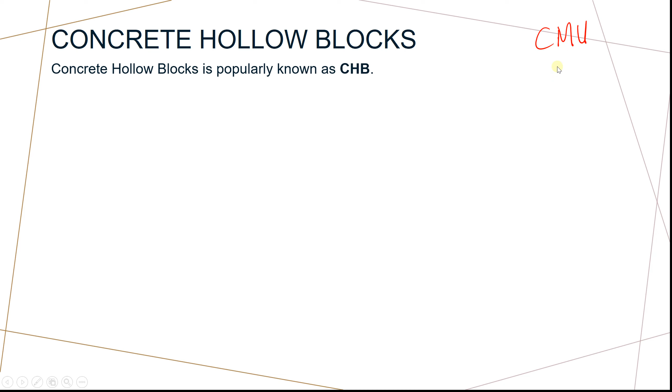Another name for this is CMU, concrete masonry units, of which concrete hollow blocks are one. Concrete hollow blocks are popularly known as CHB. CHB stands for concrete hollow block. Now, CHB is classified as load-bearing and non-load-bearing blocks.

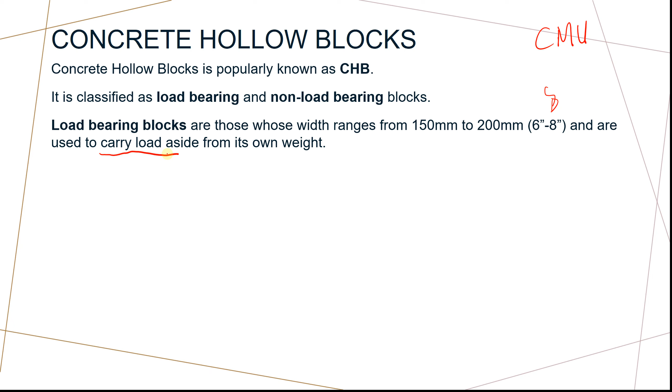Sir, what's the difference between the two? When we say load-bearing, aside from being larger, generally these are 6 inches to 8 inches. The load-bearing blocks are used to carry load aside from their own weight. So aside from self-weight, load-bearing blocks carry other loads. We are referring to the structure loads.

Non-bearing blocks, sometimes called non-load-bearing blocks, are blocks intended for walls, partitions, fences, dividers, and the like, carrying their own weight, whose thickness ranges from 70 millimeters to 100 millimeters. That is 3 inches to 4 inches. But take note that non-load-bearing blocks are not limited to this size. There are also 6-inch non-load-bearing blocks.

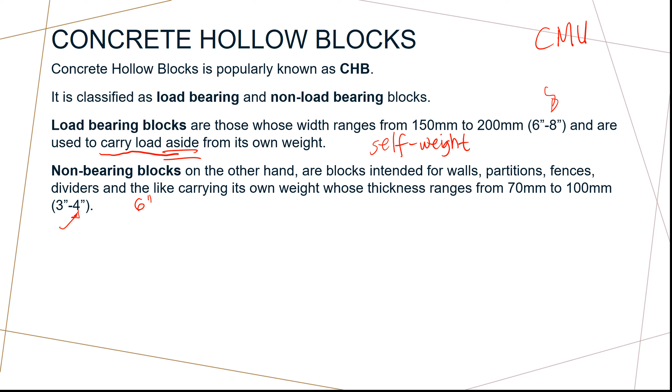But the difference between the two is that load-bearing blocks carry loads aside from their weight. Non-bearing blocks only carry their self-weight. So this is the CHB. I believe you're already very familiar with CHB because CHB is a very common construction material in the Philippines.

Now, in the CHB, if you look, we have these openings here. We call these the core or the cells. The standard CHB has 3 void cells and 2 half cells at both ends, having a total of 4. So we have 3 cells in the CHB, 1, 2, 3. And at the end, this is assumed to be a half.

But it depends on the manufacturer; they have different manufacturing equipment, and so on. So it is very important, when buying CHB, as much as possible, to stick with one supplier for that CHB, because your estimate might be wrong if you switch suppliers.

Okay. These hollow cells vary in sizes as there are different manufacturers that use different types of mold. That's why the size differs depending on the manufacturer. But in this discussion, we'll follow a standard size of these voids or cells in our calculations later on.

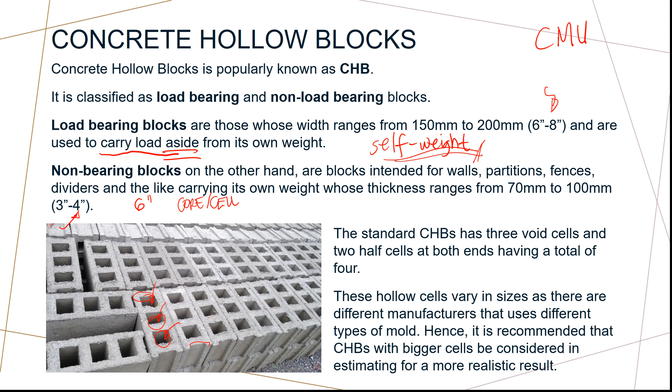CHBs are a common building material in the Philippines, used to lay out the structural skeleton of a building to be reinforced later on by beams and columns. Generally in residential structures, you'll see the wall goes up first while the beams and columns aren't there yet. So in the Philippines, CHB is generally laid out to become the structural skeleton before adding the columns and beams.

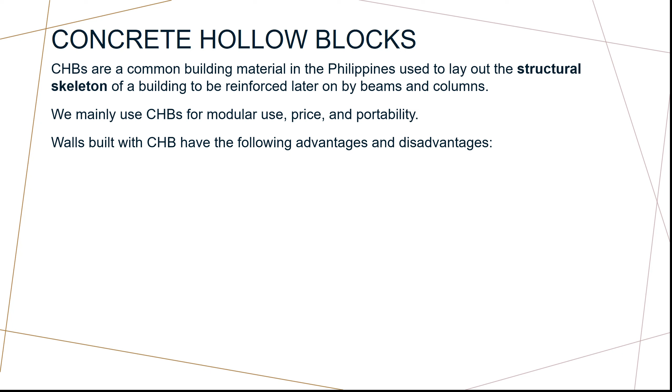We mainly use CHBs for modular use, price, and portability. Walls built with CHB have the following advantages and disadvantages. So, what are the advantages of CHB? CHB is durable and strong, non-combustible, fire resistant, affordable, readily available, yes, this is very readily available, there's plenty of supply, and weather resistant.

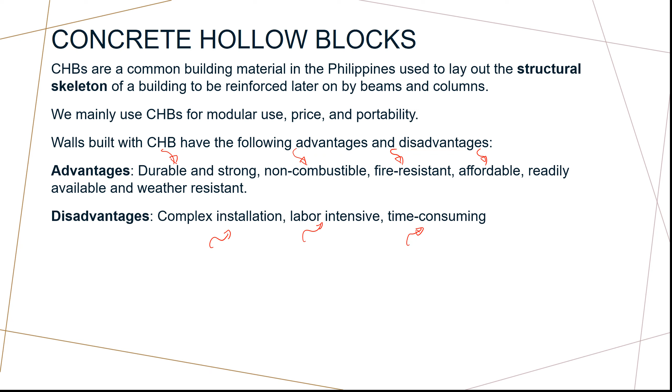Now, what are the common types of CHB in the Philippines? Aside from load bearing and non-load bearing, now we are talking about the types according to size. There are two common types of CHB in the Philippines according to size: the 6 inches CHB and 4 inches CHB, or 100 mm CHB.

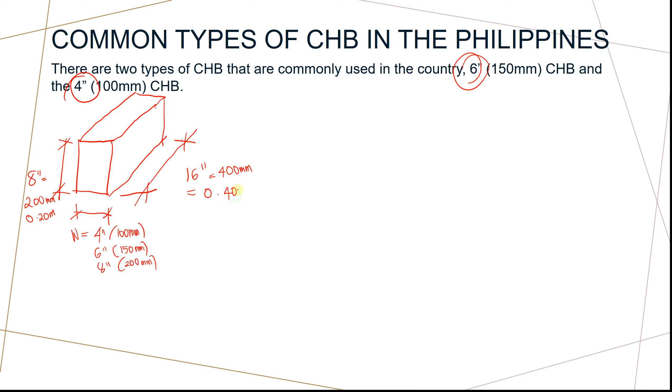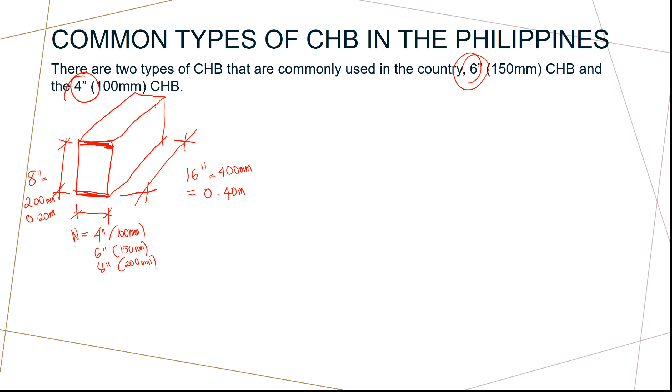So this 6 inches or 4 inches CHB, what we mean by that is the width. We have 4 inches or 100 mm or 0.10 meters, and 6 inches or 150 mm or 0.15 meters. Take note of that - this is what is meant by 6 inches and 4 inches.

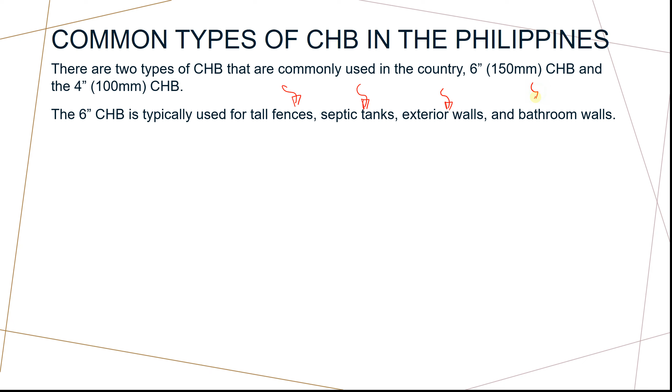Typically, the 6 inches is used for tall fences, septic tanks, exterior walls, and bathroom walls, because it is thicker. Ideally, 6 inches is better for exterior walls to help protect the structure against weather. The reason is since it is thicker, you can ensure more protection from weather, it performs better than the 4 inches which is thinner. Same goes for septic tanks and tall fences.

The 4 inches is typically for low walls and interior walls. By the way, what is considered interior walls or exterior walls? This is your perimeter, this is your house. So if you plan here, these are the walls here, whatsoever, etc. Now, exterior walls are exposed directly to weather.

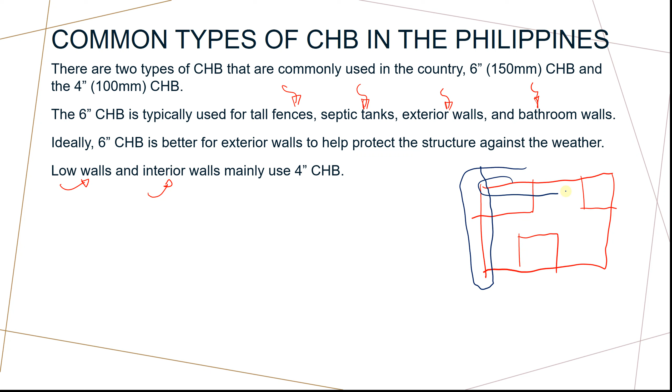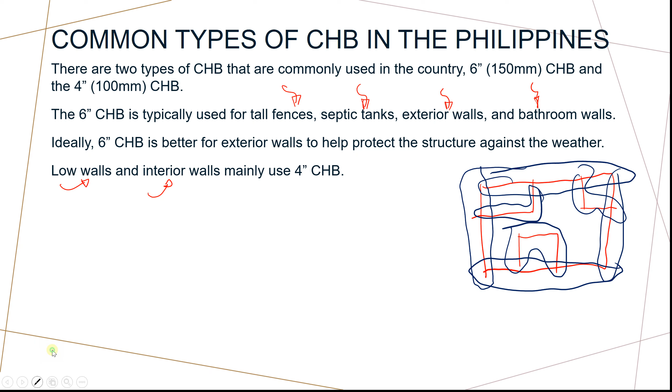So for this example, this is the exterior walls. Ideally, it's much better if 6 inches is used for that, though that is not really required that it should be 6. Others use 4 inches - that is up to the contractor, to the designer. And then the interior walls, these are inside, that we call the interior walls, because it is inside the structure. So typically, of course, interior walls use 4 inches.

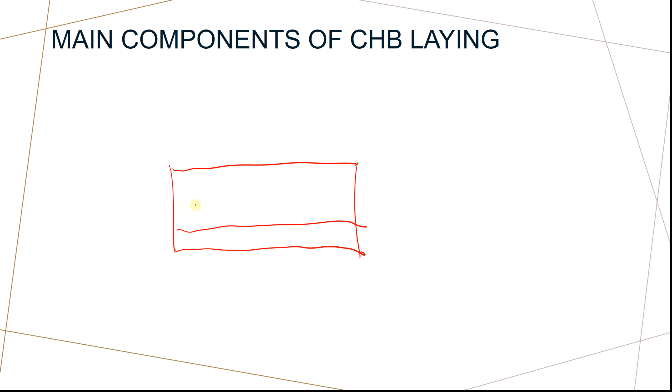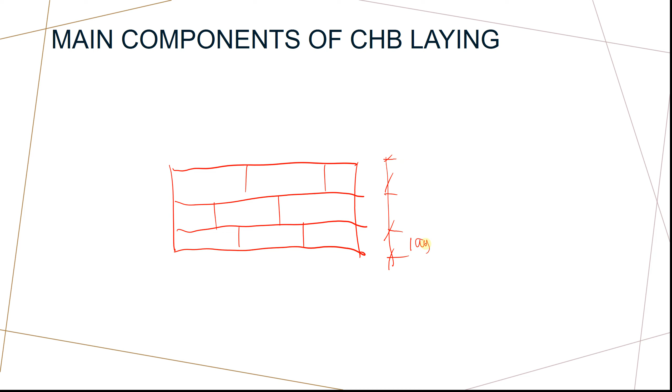Now, what are the main components of CHB laying? For the CHB, if you build it piece by piece, you do it block by block, layer by layer. So let's look at it - if we have a wall made of CHB, this is one type of arranging the CHB. If you have a wall that is arranged by block, we have layers - the CHB is layered when we install this on site.

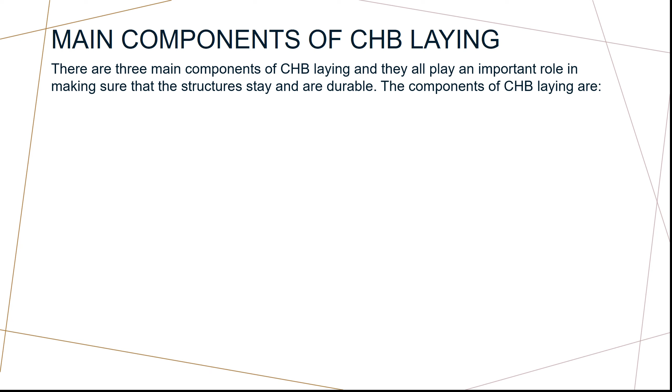There are three main components of CHB laying, and they all play an important role in making sure that the structures stay durable. The components of CHB laying are: CHB, of course, this is the basic building block. Walay laying of CHB if there is no CHB.

Mortar - what is this mortar, sir? Mortar is the mixture of cement and sand that you put in the concrete cells, the core for the CHB. Mortar helps to bind everything together and provides compressive strength to help the concrete or CHB become more durable. And then the rebar, of course, in the wall, that's the kabilya, right?

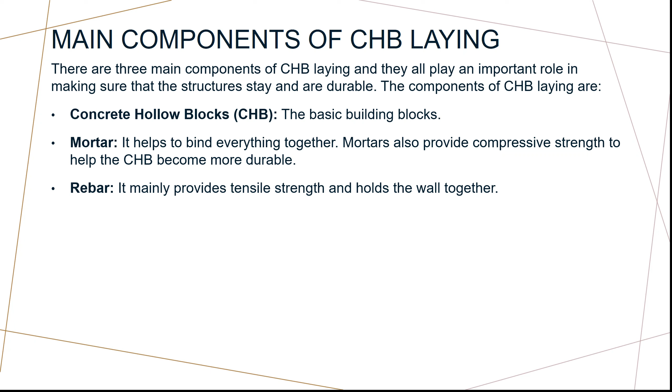We have CHB, mortar, and kabilya. The rebar mainly provides tensile strength and holds the wall together. That is the main components of laying.

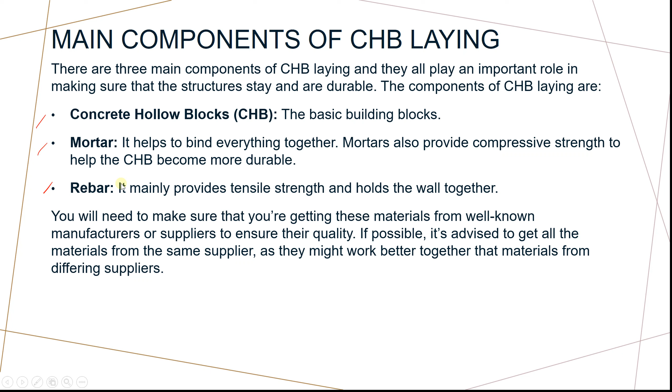So his advice is to make sure these materials, the CHB, the mortar - the cement and the sand - and for the rebar, get them from a supplier that you know ensures the quality. If you're familiar with the supplier, you know the quality, right? And much better if it's just one supplier as much as possible.

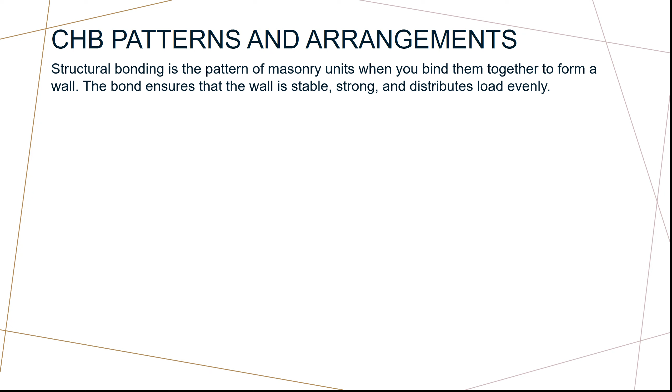Okay, let's discuss first the CHB patterns and arrangement before we proceed with the actual estimation of the CHB. There are several patterns and arrangements for the CHB, but in the Philippines, the common CHB arrangements are the running bond and the stack bond.

Running bond is the most common CHB pattern in the Philippines used in construction, composed of CHBs that are offset by half. The installation is that the CHB is offset by half per layer - each layer is offset by half - with a core filled with mortar and rebar.

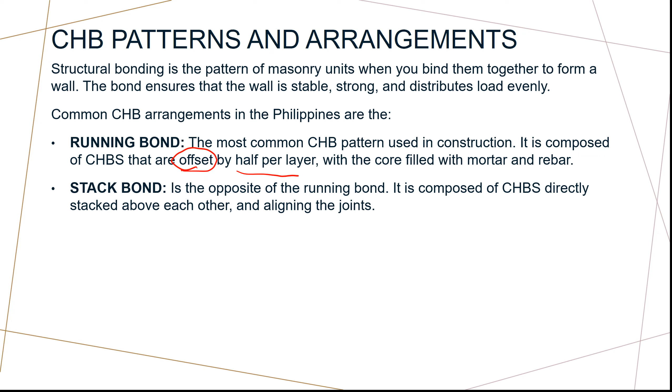Stack bond is the opposite of running bond, composed of CHBs directly stacked above each other and aligning the joint. Now we have what is called structural bonding. This is the pattern of masonry units when you bind them together to form a wall, and this bond ensures that the wall is stable, strong, and distributes load evenly.

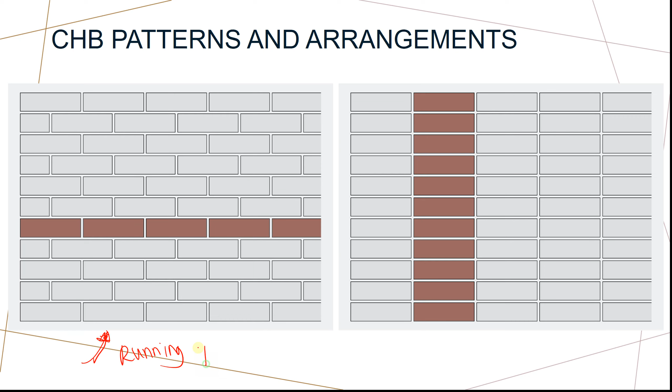This common one you see, we call this the running bond. If you notice, there's a half interval of the CHB here, and then the next layer is offset by half.

Now for the stack bond, this one is stack bond. You just stack them straight - stack them straight from bottom to above. That is the stack bond.

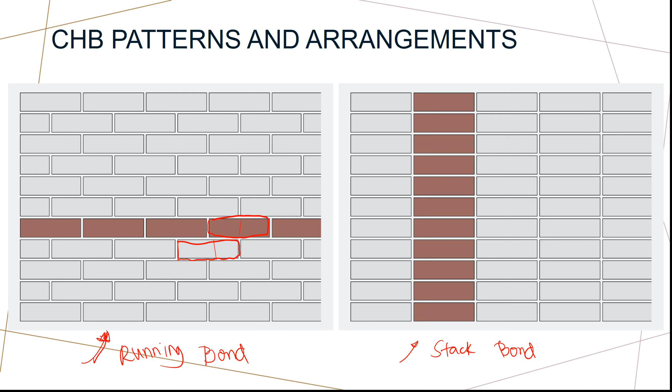In this study, we want to know the quantity of materials needed for a certain masonry work. So that's the goal here - we need to determine the quantity of materials for the masonry work.

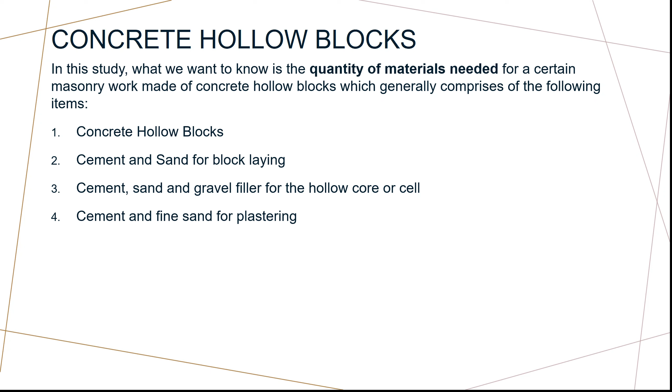Generally, the estimation comprises the following: determination of the quantity of CHB, cement and sand for laying, cement, sand, and gravel filler for the hollow core or cell, cement and fine sand for plastering, cement, sand, and gravel for foundation or footing, the rebars, and the tie wires. The cement, sand, and gravel for the foundation and footing, we have already discussed this in the previous discussion on concrete works.

The rebars and tie wires will be discussed in the next meeting. In this discussion on masonry units, we are very particular on the determination of the quantity of CHB, and this is the mortar for laying and filling the core. And then this one, number 4, is the mortar for plastering.

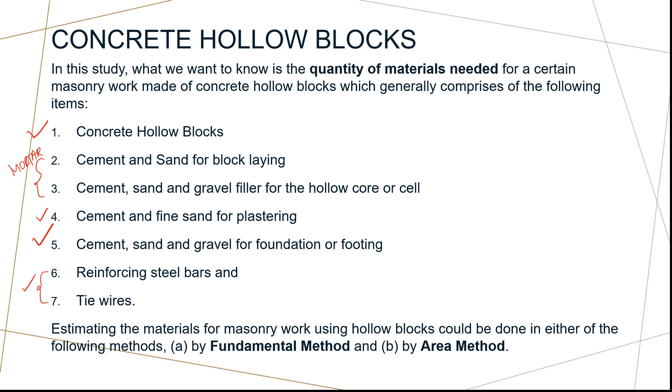Now, estimating the materials for masonry work using hollow blocks could be done in either of the following methods: the fundamental method and the area method. The fundamental method is the volume method, and we'll discuss that in the next video.